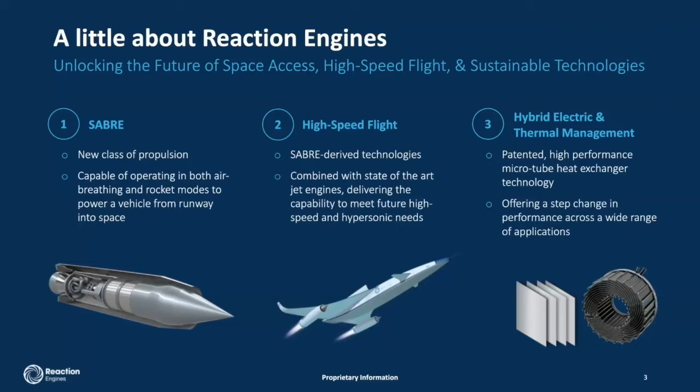And at the heart of this is some really advanced heat exchanger technology, which allows this sort of engine to be possible. Now, that same heat exchanger technology could find spin-out in a number of segments. One place we're looking at quite actively is high-speed flight, which is a really popular avenue for potential future applications. Another big avenue for it is anywhere where you need thermal management. So that could be in aviation, it could be in automotive, it could be in energy generation. The heat exchanger technology we've developed could offer a step change in performance in any number of applications, and that's really how this project came to be in the first place.

Now, why do we want to look at aviation and zero carbon fuels? Well, because getting aviation to net zero is a huge challenge, and a challenge we have to meet. The UK is committed to net zero by 2050, and that includes aviation. These charts from Sustainable Aviation, published in March of 2020, show one potential path where you're looking at the effect of carbon price on demand, improved operations, fleet upgrades, sustainable fuels.

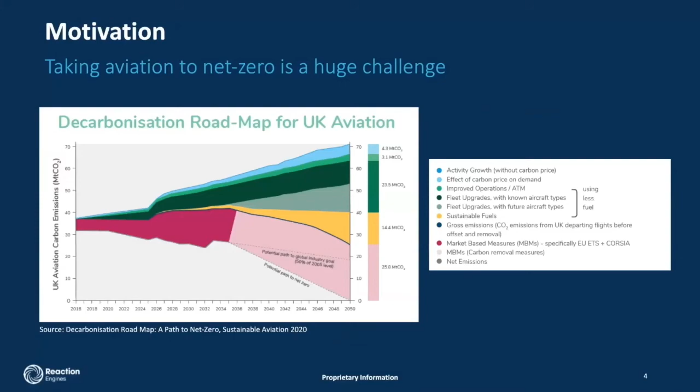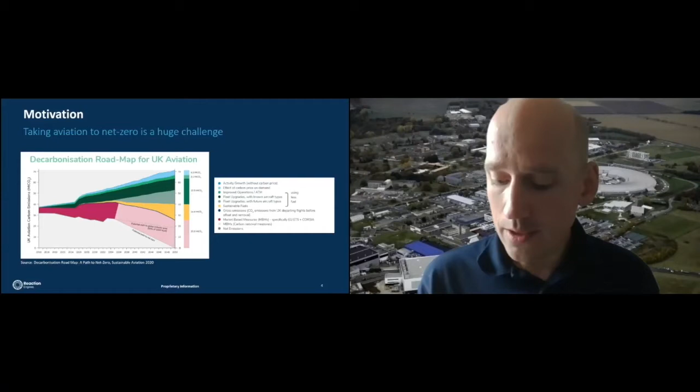But doing all those things, you still have to have some kind of market-based measures to get to a net zero solution, which is certainly a possible way of doing it, but it's a bit of accounting sleight of hand to show that someone else is effectively not emitting on your behalf. If, on the other hand, you could find another route to decarbonizing aviation that didn't require that, you would have a very compelling thing on your hands. And that's what ammonia could possibly give you.

Ammonia offers you a route to zero carbon air travel that is quite cheap. If you look at this chart on the right, it's from the International Energy Agency. These are the near-term and long-term, so 2030, 2050 timescale production costs for green hydrogen, ammonia, and synthetic aviation fuels. And you can see ammonia is actually very cost competitive. But it's cost competitive for more reasons than just its production costs.

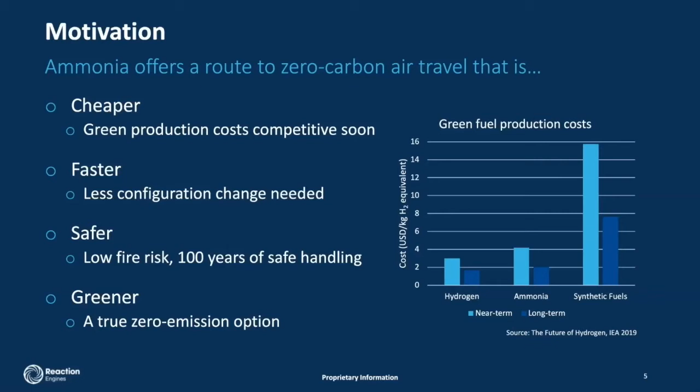Ammonia has a pre-existing infrastructure, and as we'll show in a few slides' time, you don't actually necessarily need to change as much about your aircraft or your engines. And that means potentially you could also do these changes to a green or zero carbon aviation system in much less time than other systems might need. That's also aided by the fact that there's an existing ammonia infrastructure. 1 to 2 million tons of ammonia are loaded and unloaded off of deep sea going ocean vessels every month as they ship it around the world.

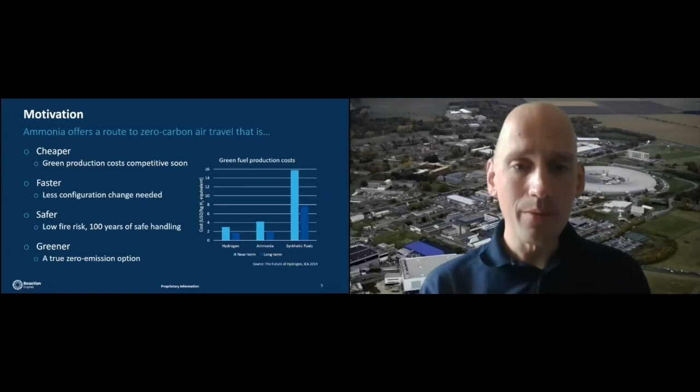That infrastructure is safe. Despite ammonia's toxicity, we've been handling it as a species for more than 100 years without major incidents. It's also a remarkably low fire risk, especially relative to something like jet fuel. And that's actually one of the main challenges of using ammonia in an aviation context, is it's not easy to burn. But if you can get it to burn, you're left with a fuel that has zero carbon, which means zero CO2 and zero soot emissions.

There's no sulfur in it to create sulfur oxides. And, while it is a nitrogen-bearing fuel, It is possible to burn ammonia without generating a lot of NOx emissions. And ammonia itself is used to scrub NOx emissions. So you have the potential, using ammonia, for a true zero-emission aircraft and engine combination.

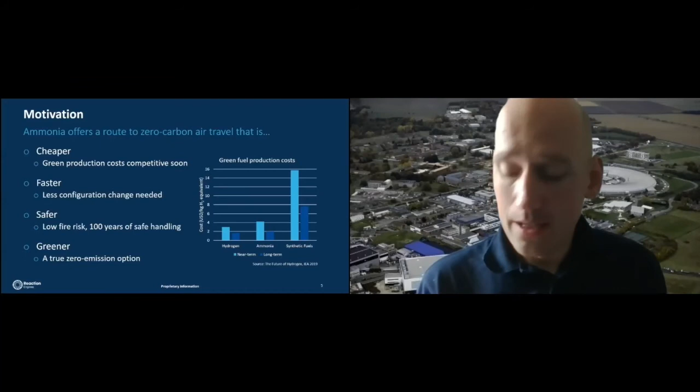So this project was set up to investigate how that might look. And so the four main goals were to see how we could take Reaction Engines' thermal management technology and STFC EnergyTec's catalyst technology to make a zero carbon aviation system. So within this were four main goals. One was looking at how that system would look thermodynamically and physically, both at an application and demonstrator scale.

Apply Reaction Engines' heat exchanger technology to the vagaries of using ammonia as a working fluid to take heat out of a jet engine's exhaust. We explored how reactors could be set up to use the STFC's catalyst technology, and we also investigated how that catalyst itself performs at elevated pressures, which is something that hadn't been done before.

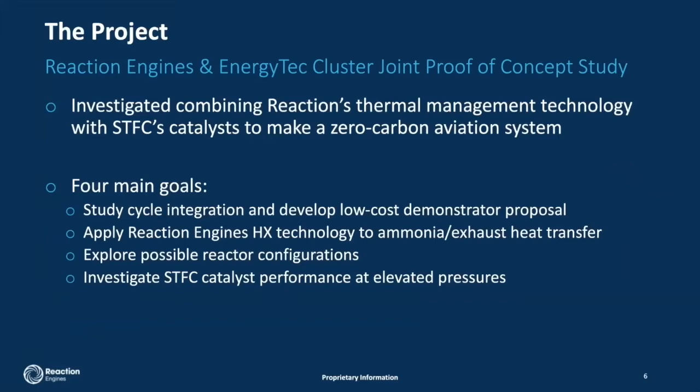And the results were very promising. The catalyst performance at pressures up to 5 bar, which is how high we could go during the scope of this study, was showing equal or better performance at elevated pressures, which is really intriguing behavior and something we're keen to explore more.

Cycle-wise, we showed that existing turbofans can burn an ammonia-hydrogen blend with only minor changes to the engine architecture. So if you have a cracking reactor that can give you something like 30% of the ammonia cracked into hydrogen and nitrogen, you can use the exact same turbomachinery, which means all you need is a new combustor and new heat exchangers, which is much less than a brand new engine in terms of development cost and time.

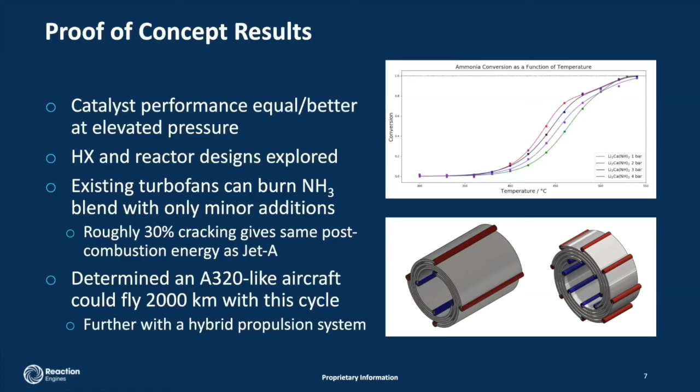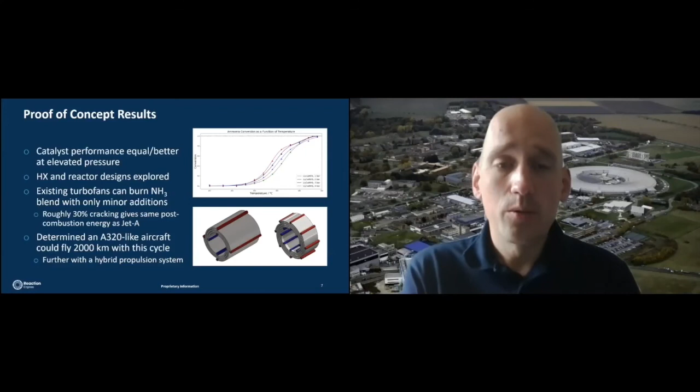We also looked at the impact of using a cycle like this in an aircraft similar to an A320 and showed that it could fly in the neighborhood of 2,000 kilometers, a little bit more actually, which is enough to cover the vast majority of the short-haul aviation market today. It's also potentially feasible to integrate this sort of jet engine concept burning ammonia with an ammonia-based fuel cell to come up with a hybrid electric propulsion system, which would give you much better range than even this would give you.

And the way a system like this could work is you would have ammonia, which when you chill it to about 200 Kelvin is actually very similar to kerosene in terms of its density, which means it can be stored in wing tanks. That ammonia could be taken from the wing tanks and pumped through heat exchangers in the exhaust of the jet engine, taking some of the heat that would otherwise be dumped overboard to heat the ammonia up to a temperature where, when you put it in the presence of catalysts inside a reactor, it cracks readily into hydrogen and nitrogen.

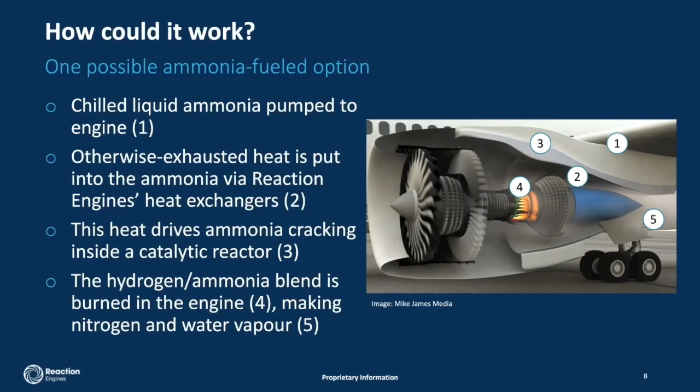That hydrogen, nitrogen and ammonia blend could then be burned inside the engine, and the main byproducts would be nitrogen and water vapor. So it's a really promising architecture for future aircraft systems. And that's really one of the big takeaways of this: it's actually something that could be done feasibly, and it could be done quite quickly with the right funding and the right motivation.

You could see aircraft fueled by ammonia flying by 2030. That's perfectly technically possible. And that's largely driven by the fact that you don't have to reinvent the aircraft or the engine in order to do this.

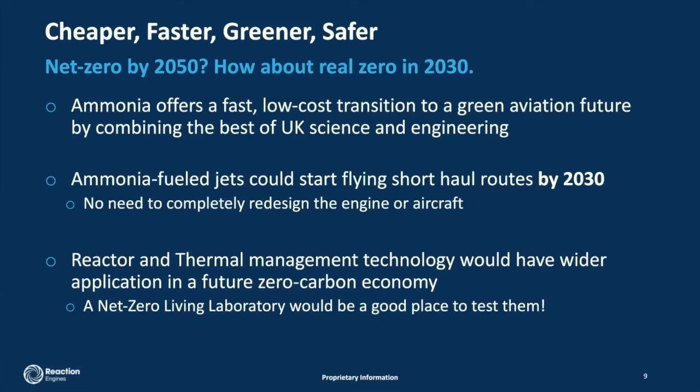But beyond aviation, the sorts of technology, the reactor and heat exchanger technology, would have wider application in a future zero carbon economy. So it could be used in any number of industries. And a great place to test a lot of these technologies could be something like the Net Zero Living Laboratory Harwell is trying to get set up.